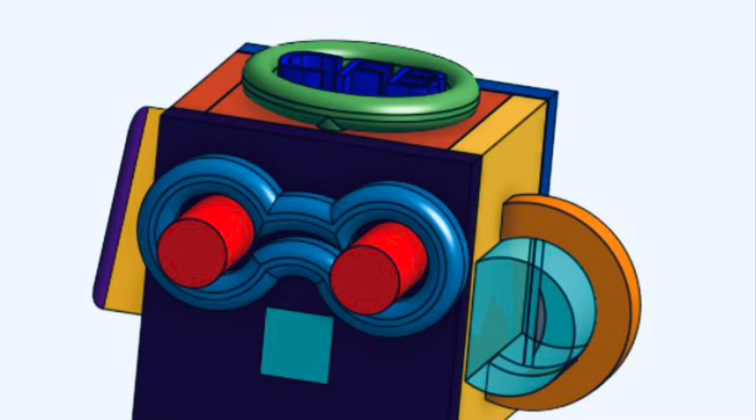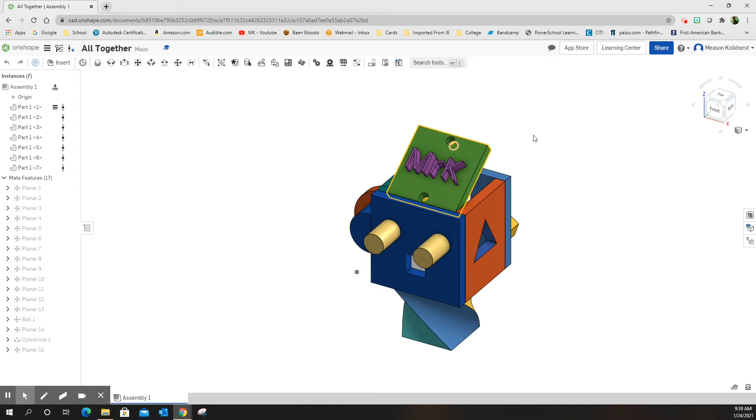Put in the Pentagon cover. So I'm going to go back into All Together. You may not have to, you may be in it already. I want to spin this around because I'm going to put the Pentagon cover on it, which is going to go on the back here.

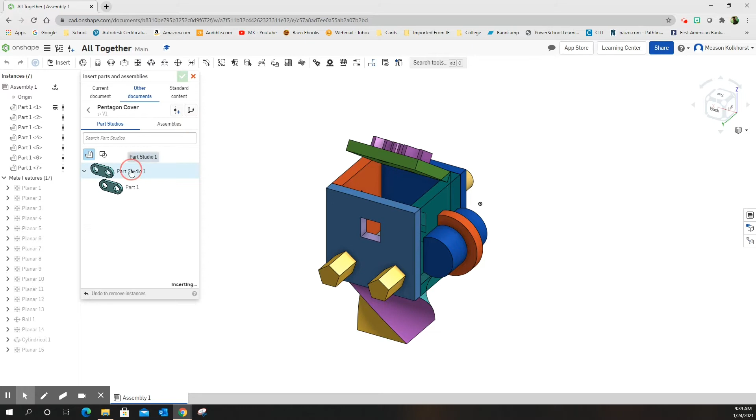Insert, Other, My Onshape, Fancy Cube, Pentagon cover. Create a new version, create. Part Studio 1, and set her down. Green check mark. Okay, first thing we need to do is we need to get the two planes lined up with each other. So I'm going to use the planar mate.

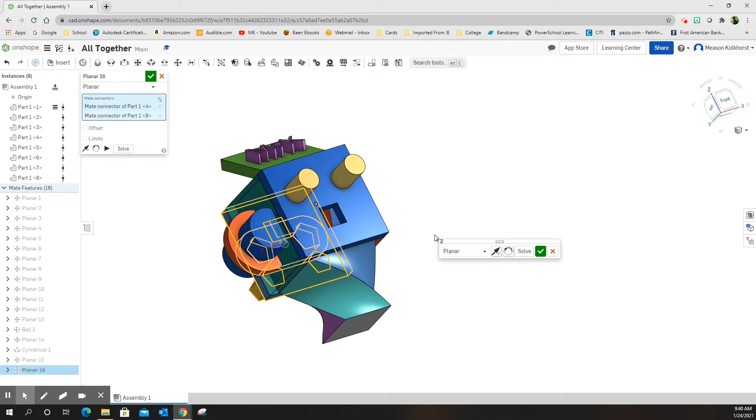I want this plane, and I'm going to use my arrow keys, and I want this back plane. Go back to where I was with my arrow keys. Green check mark. Okay, so we know we have it in the right place. It just moves around. When I go to isometric, go to the right face, you'll see that it's lined up perfectly on there. Let's go back to isometric.

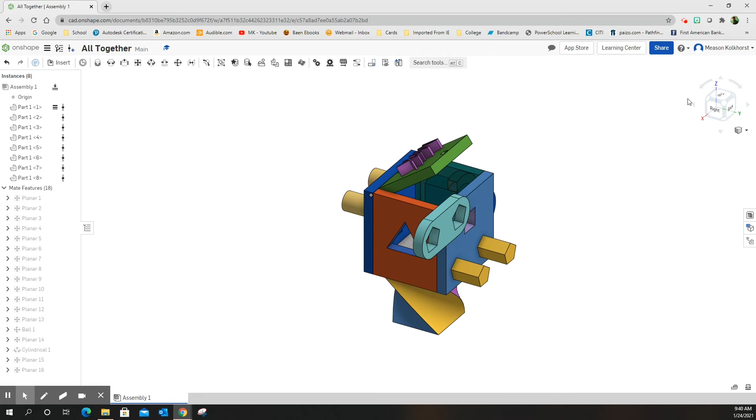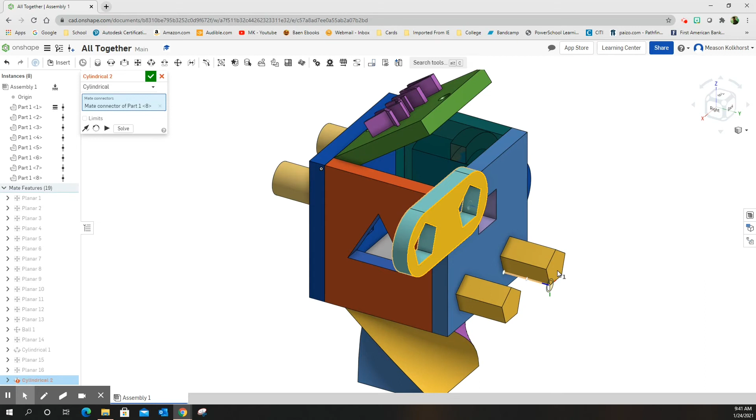Okay, so now I want these pentagons to line up. So I'm going to use the cylindrical mate again, and even though it says cylinders, when I come over here I can choose the cylinder of these shapes, and it doesn't look like it's a cylinder, but if I move it around right, I should be able to get the center here and the center of

this guy. Well, let me move it. There we go. Get the center of this guy and green check mark, and he pops back into place. That's with the cylindrical mate. Even though it's not really a cylinder, remember when we made those, they were based off of circles.

All right, so we're going to grab this guy, and now he'll rotate on that, which is fine. We're going to lock him down on the other one now. So it's touched up against the back plane. It's cylindrical mate on my pentagon. I'm now going to use cylindrical mate one more time. And I'm going to cylindrical mate.

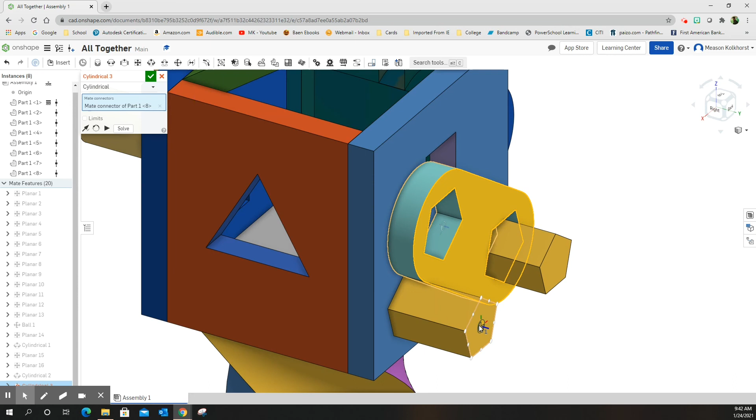There it is. The center of this pentagon and the center of this pentagon. Moves it out front, but that's okay. When I hit green check mark, he pops back into place and he can't go anywhere. So when I click on him and drag him, he can't go anywhere. There you go. Part number 2 done.